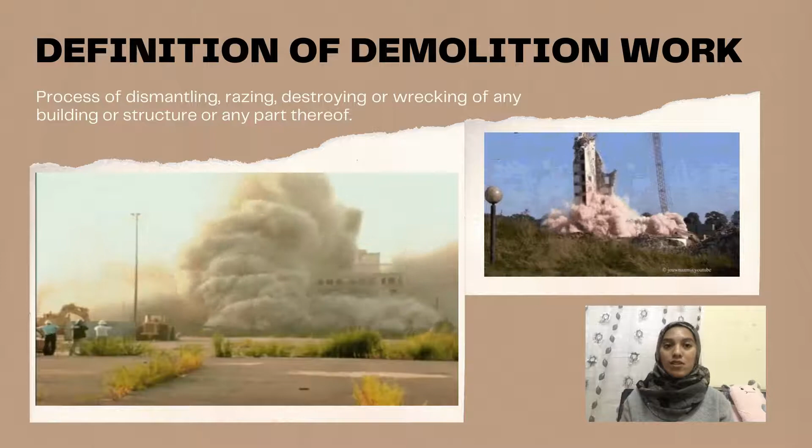I will continue our presentation by explaining in detail the steps to be done before starting demolishing a building or a structure. The first step that needs to be done is surveying.

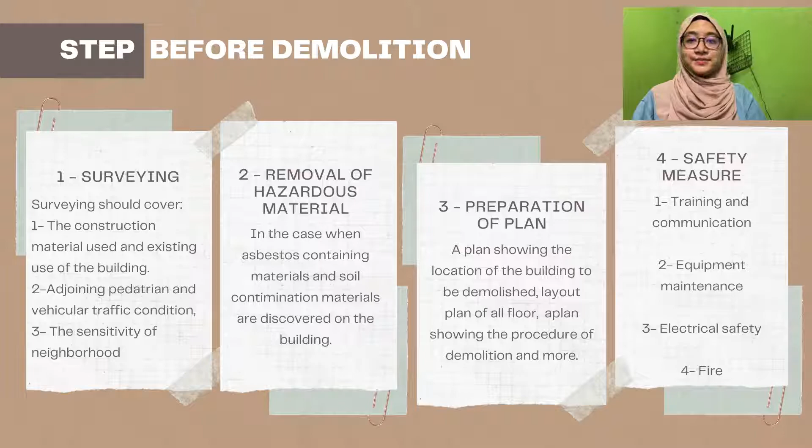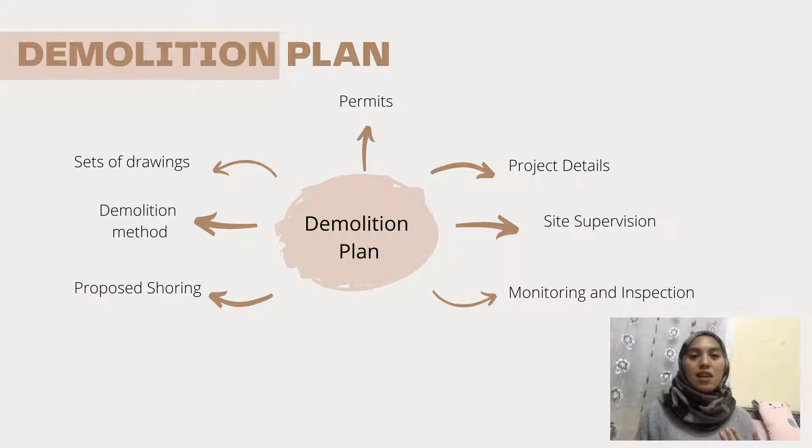This is the demolition plan, either before the demolition work starts or throughout the project. The demolition plan should include a set of drawings showing the building location, existing structure, and so on, proposed demolition method, project details, and proposed shoring either to the existing building or adjacent building. Throughout the project, site supervision, monitoring, and inspection should also be carried out.

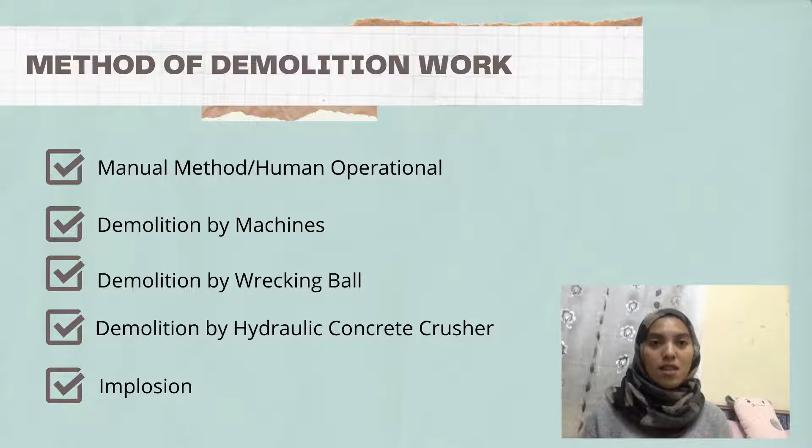Next, we move to the demolition method. There are many demolition methods that can be applied, but here we only highlight about 5 types of methods. The demolition method depends on the area of the project, time available, and the purpose of the demolition.

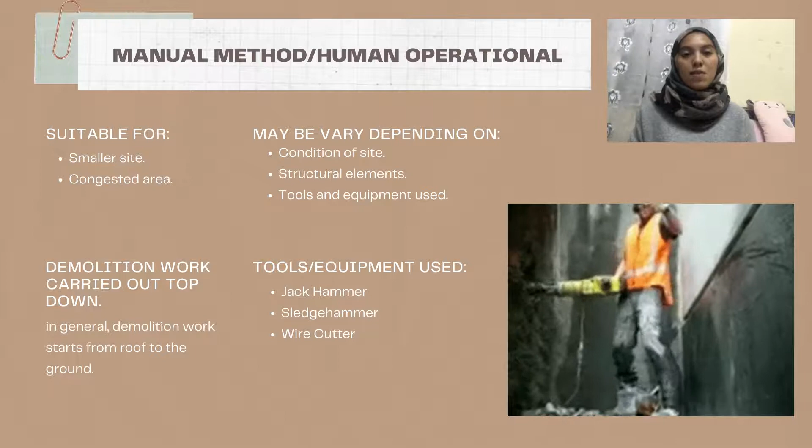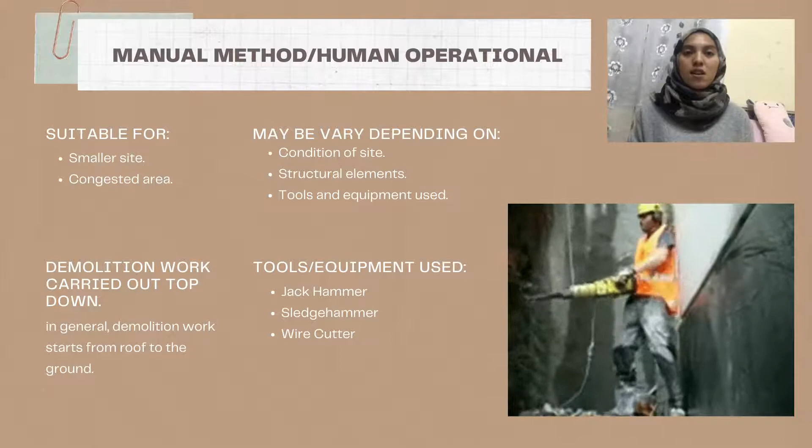The first method is manual or human operational method. This method is suitable for smaller or congested areas. It is carried out top-down, meaning from the roof to the ground. It may vary depending on the condition of the site, structural elements, and tools or equipment used. Tools or equipment used include jackhammer and sledgehammer. The second method is demolition by machine.

The sequence of demolition work is the same as the manual method, but this method is done by mechanical plant. The work begins with lifting the mechanical plant to the top floor. Adequate propping shall be installed at the floor level below as support. However, the movement of the mechanical plant shall be within the prop area, and then the machine shall descend down to the next floor by means of a ramp.

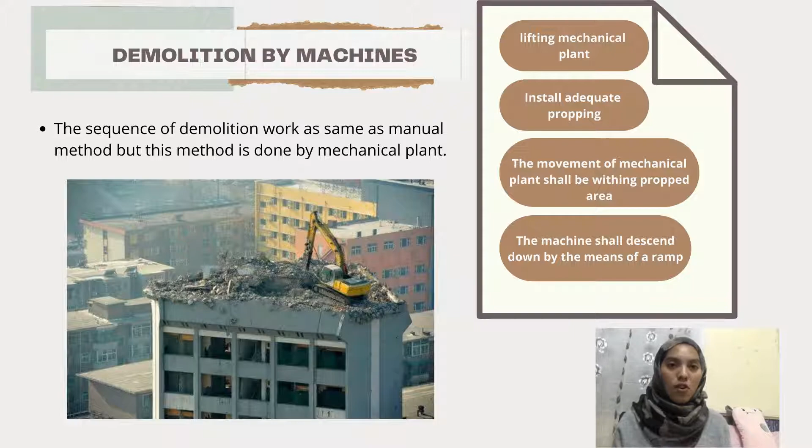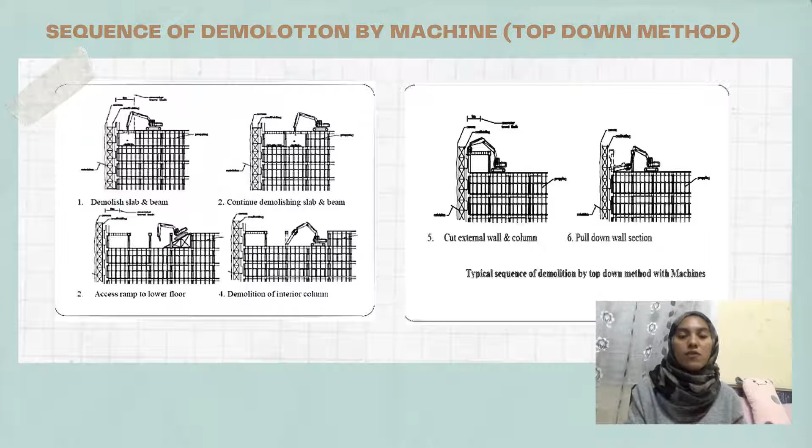This is the sequence of demolition work by machine. The work starts with demolishing slabs and beams until finished. The machine will descend down to the next floor by means of a ramp to demolish other parts of the structure.

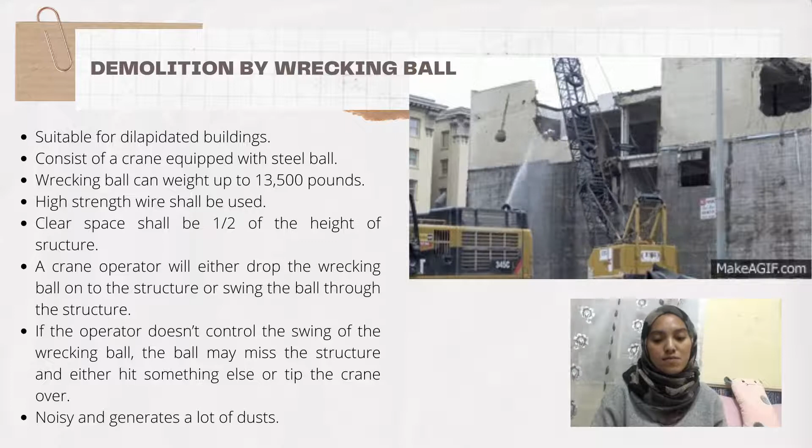The third method is demolition by wrecking ball. This method is suitable for dilapidated buildings. It consists of a crane equipped with a steel ball which can weigh up to 13,500 pounds and requires high-strength wire. A clear space shall be half the height of the building. For this method, a crane operator will either drop or swing the ball onto the structure of the building. An experienced crane operator is required to avoid the ball missing the structure or hitting something else. This method generates a lot of dust and can be very noisy.

Next is demolition by hydraulic concrete crusher. A hydraulic concrete crusher can be operated from the ground outside the building. This method also requires a minimum clear space, which is half the building height. The structure shall be demolished with a top-down sequence. This method can reduce noise nuisance.

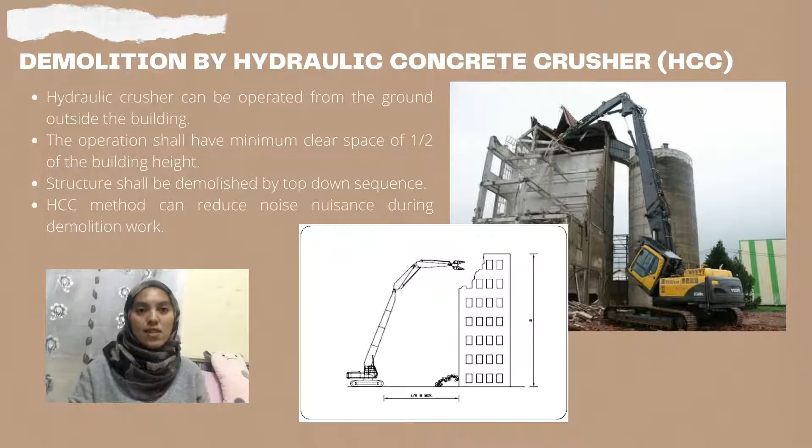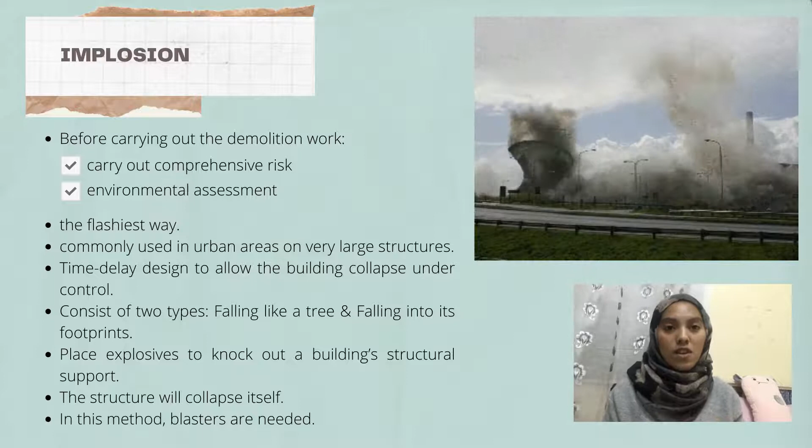The last method is the implosion method. Before carrying out the demolition work, the contractor should carry out a comprehensive risk and environmental assessment on the effect of the implosion on the neighborhood. This method is the flashiest way to get rid of a building structure. In brief, this method is usually done in urban areas or for large structures. Time delay design is important to allow the building to collapse under control.

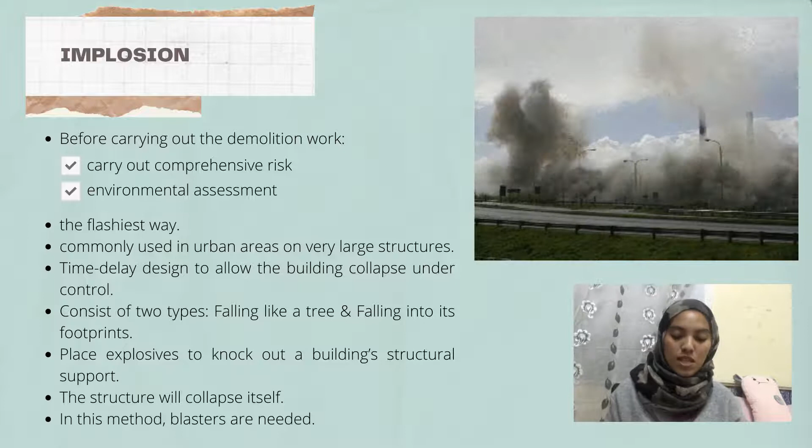There are two types of collapse: falling like a tree and falling into its own footprint. How does it work? By placing explosives to knock out the building structures, and then it will collapse itself. In this method, blasters are needed.

What is a blaster and what does a blaster do? A blaster is an explosive worker. A blaster assesses the needs of the demolition project to determine how much needs to be removed or destroyed. Other than that, a blaster drills holes in rock or structural supports, packs the holes with explosives, and oversees the detonation. A blaster also monitors the safety of everyone on site during the blasting procedure.

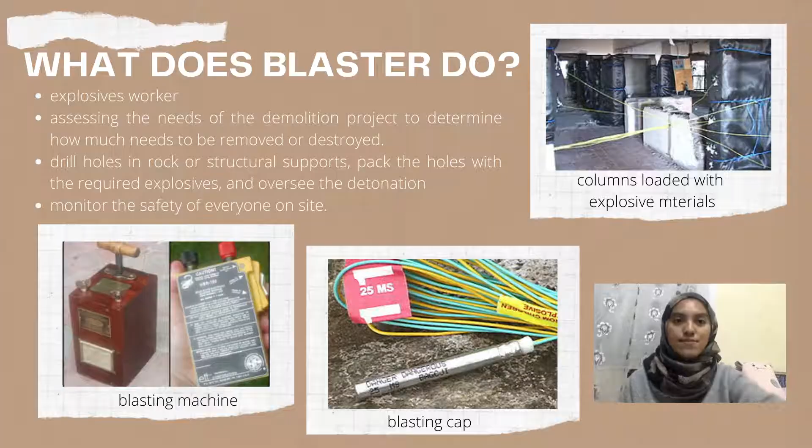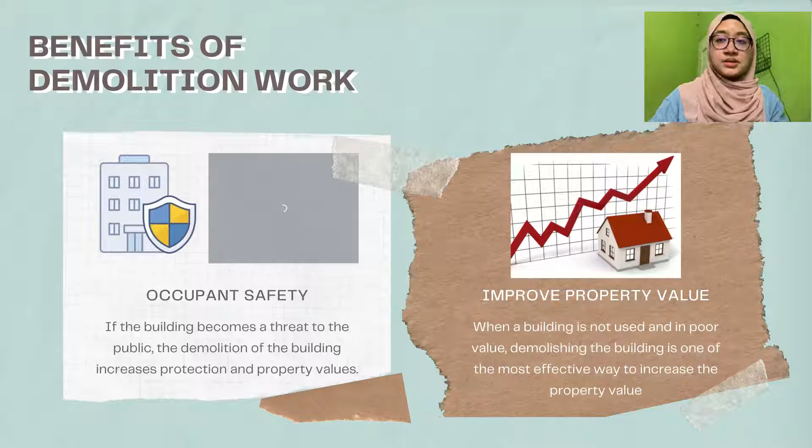The next one is improve property value. Property value can be improved by demolishing the current building and starting a new project on the same site. This proves that demolition work is one of the most effective ways to increase property value. For example, a residential building constructed in 2001 is currently vacant due to its old design or lack of safety precautions, since it was built almost 20 years ago. By demolishing the building and constructing a new project with modern design and high safety, it will improve the value of the building and attract customers or clients to buy the property.

The third benefit is new development. As mentioned in the previous benefit, after demolishing a building, a new development can be created. If the land is in a strategic place and can be used in beneficial ways, dismantling the current building would clear the way for it. Maybe the current building on the land didn't get much attention or attraction from the client or public, or has already been vacant for a long time. A new development is a good way to overcome this issue.

Last but not least, demolition work can be environmentally friendly. Some material from demolition work can be recycled for the next construction work or project, as long as they are in good condition. There are many materials that can be recycled from demolition, such as concrete, bricks, aggregate, metal, wood, and glass. Recycling materials from demolition work not only saves the environment, but also reduces costs for the new project or development in the future.

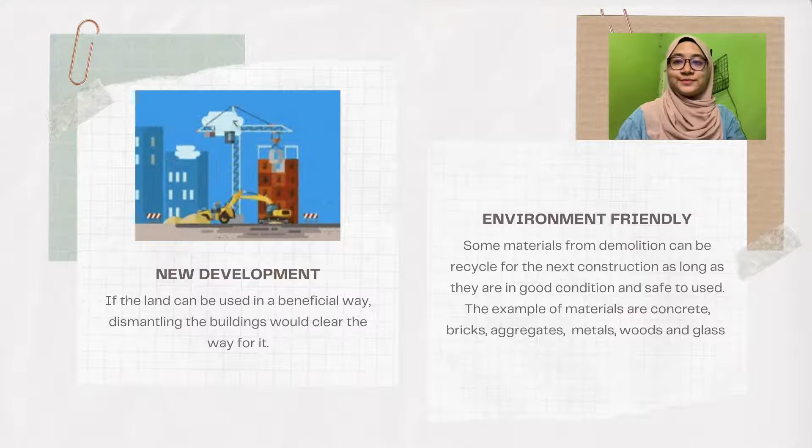Some challenges can occur during or before demolition work. The first challenge is heritage conservation law. Heritage conservation law covers certain buildings of historical or cultural significance to protect them. In some situations, the building to be demolished itself is not of any cultural significance, but it is built in a conservation area. This means the building is still covered by national heritage.

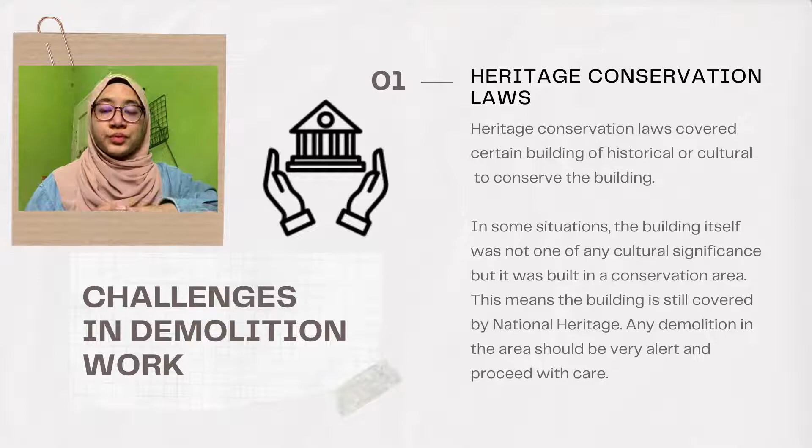If the building is covered by national heritage, it does not mean demolition work is impossible. To perform demolition work on such a building, special permission from national heritage is required, which may delay the project beyond the estimated time. Any demolition in the area should be done with great alertness and care, since it is a conservation area protected by national heritage. The second challenge in demolition work is a place where noise is a problem.

Noise can be disturbing for the area surrounding any demolition work, but there are some instances where the loud work can be particularly problematic. Some places such as hospitals, schools, shopping centers, and residential areas are where the noise from demolition work can be a distraction.

One of the most common examples is when demolition work needs to be done near a hospital. Not only is the sound loud enough to disturb the patients, but the equipment's vibration from demolition work may also interfere with the electronic equipment in the hospital. It is important to make arrangements before starting demolition work to minimize the risk and the stress.

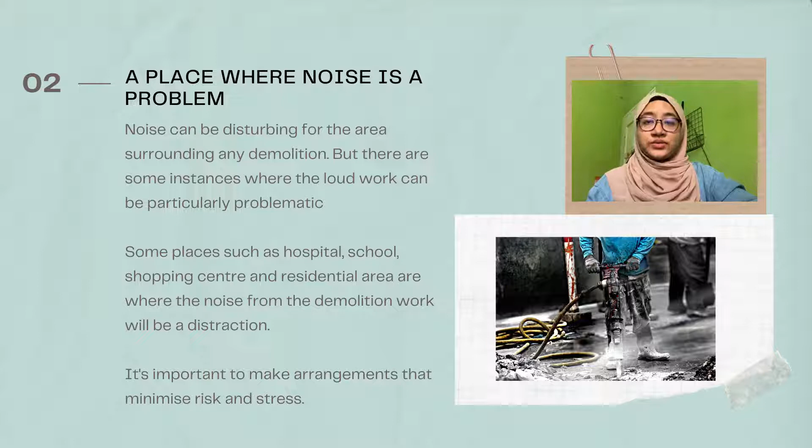The next challenge is hazardous chemicals. Demolition work may involve workplaces or structures that contain or have contained hazardous materials, including chemicals. Hazardous chemical materials include lead, asbestos dust, soil contamination dust, and combustible material that can risk workers' and the public's health.

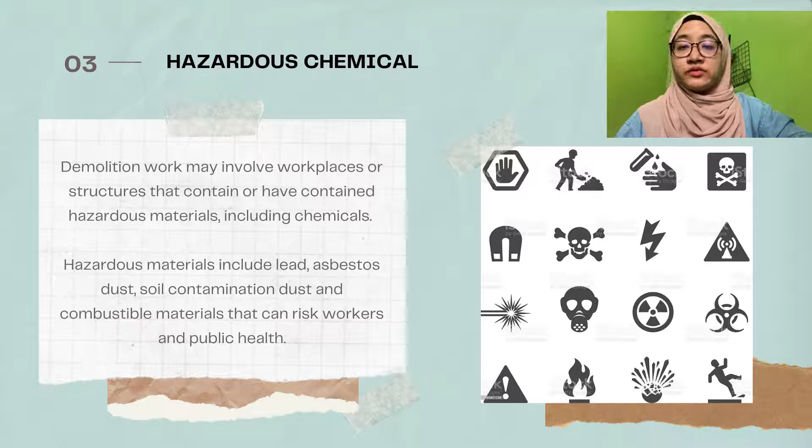Any material that has asbestos or soil contamination generates dust if it is handled or removed before the demolition. Some materials that can contain these hazardous substances include insulation material, fire-resistant wall sections, and flooring. By inhaling this dust, it can lead to respiratory issues for humans. To prevent this from happening, this material should be removed by a certified worker before the demolition work starts.

The last challenge that I will explain is regarding surrounding buildings and structures. If the building to be demolished is attached or situated close to neighboring properties, it takes extra planning and cooperation from the public to carry out the demolition work. It might be necessary to evacuate people from the area for a short time before performing the demolition work.

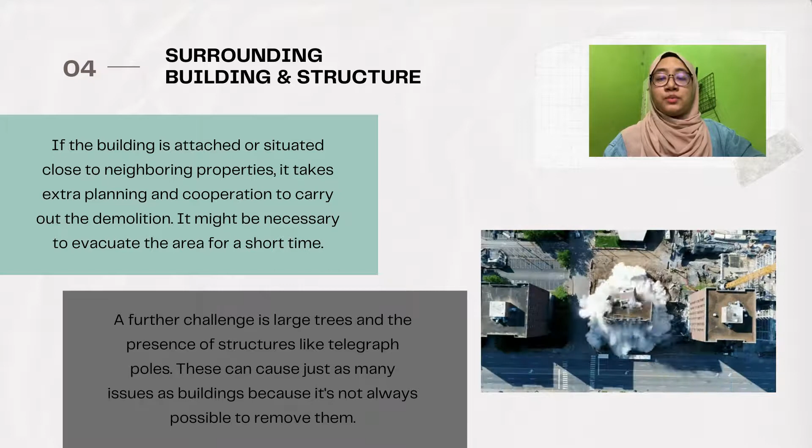A further challenge is large trees and the presence of structures like telegraph poles. This can cause just as many issues as buildings, because it is not always possible to remove them. They will stay in their place, and this issue will be a problem for conducting demolition work and might cause delay to the project.

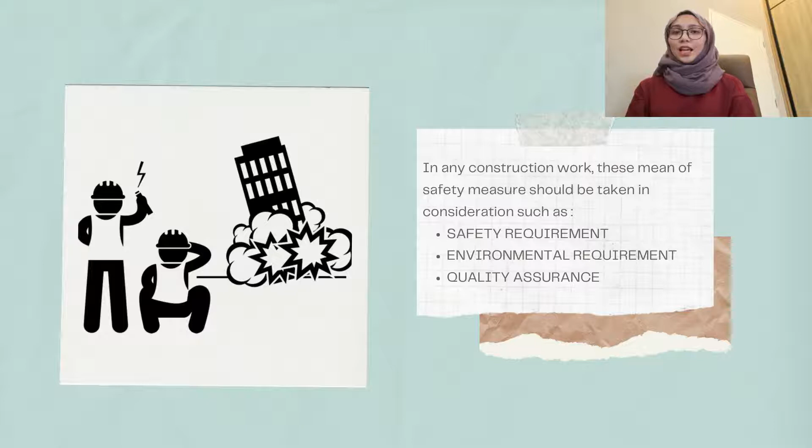Under the safety measures to be taken at any construction site before commencement of work, these are the aspects that should be taken into account: safety requirements, environmental requirements, and quality assurance. Let's move on to the next slide to know more about these aspects.

The first aspect is the safety requirements. Safety requirement is important in making sure all the works to be carried out on site are at the lowest or minimal risk against the people involved on site.

The second aspect is the environmental requirement, a requirement that is mostly related to environmental safety. This aspect focuses on looking after the safety, health, and environment while commencing the work on site.

And lastly, the quality assurance. Quality assurance or QA is the aspect that ensures the work is done at the right place and at the right time efficiently before deciding to commence the work on site.

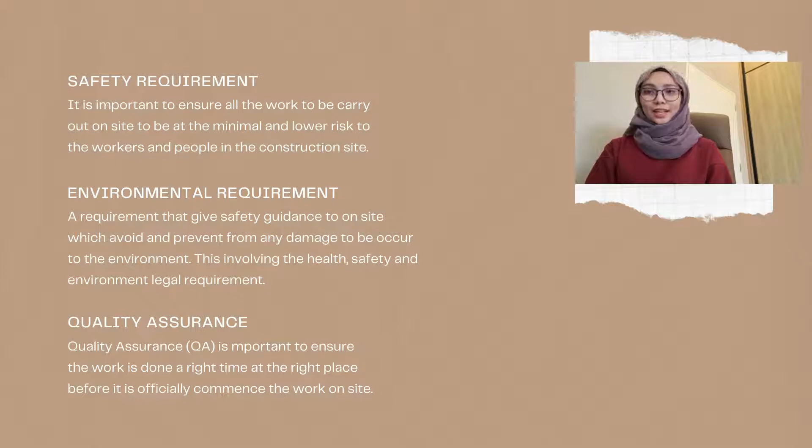Let's go deeper into these aspects. The first one is the safety requirement. This consists of risk assessment. According to the Occupational Safety and Health Act (OSHA), the first step is to identify the hazards involved with the proposed work. Second, to consider who might be harmed.

Third is to evaluate risks and identify precautions. Fourth, to record the findings and implement control measures for the residual safety. And lastly, to review and update if necessary.

In our case study, it involves a schedule of tasks, expected consequences, and who might be exposed to it. This will be the guidance and precaution step for the people involved, with mitigation measures and who will need to take the responsibility.

Next, under the safety measure requirements, is information to personnel. This is to ensure the risk of exposure towards the people involved with the work is minimized. All personnel should wear PPE such as safety helmets, suitable basic protective equipment, and additional PPE whenever required, and safety briefings will be conducted every morning before commencing work on site.

Next is the permit requirement. Permit to work is needed and must be implemented to ensure that the personnel involved in the project are aware of the hazards and the nature of the work they will carry out, and the client needs to provide a well-managed, safe, and restricted working area.

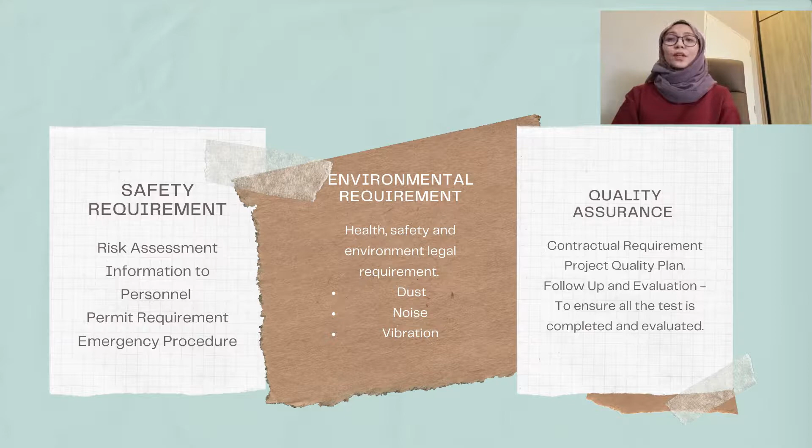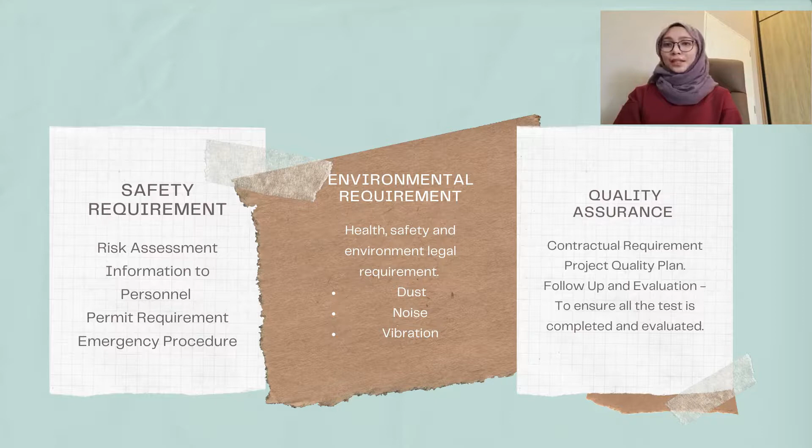From the point of view of our case study, it has the contractual requirement, which is the project quality plan, and the follow-up and evaluation to ensure all tests are completed and evaluated before commencement.

These are examples of documentation under the safety measure requirements. The first one is the job risk assessment. The second one is the environmental operations control log, and the third one is the quality control inspection checklist.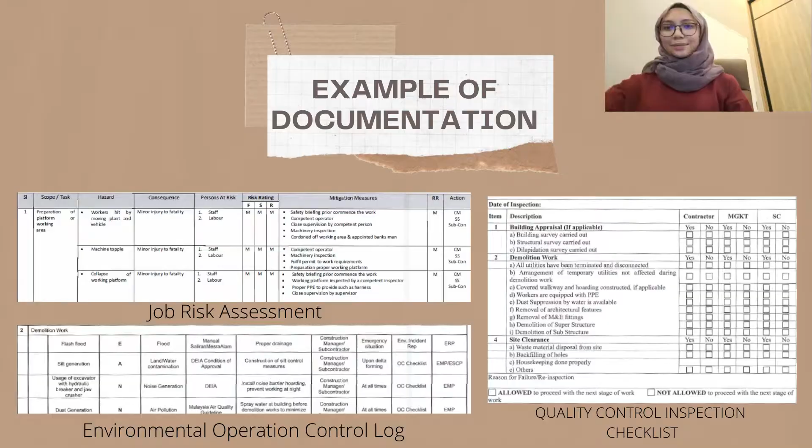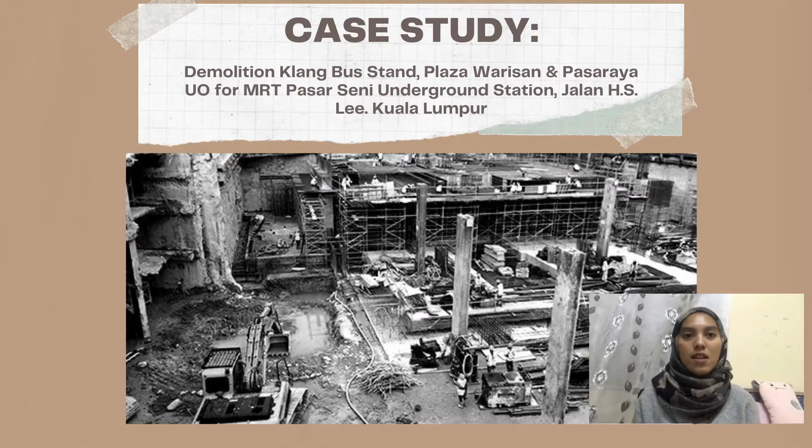Now we will go through our case study for this topic. The chosen case study is the demolition of Klang Bus Stand, Plaza Warisan, and Pasaraya UO for the MRT Pasar Seni Underground Station. The company in charge for this demolition project is Multi Demolition, and the timeline of this project is 12 months.

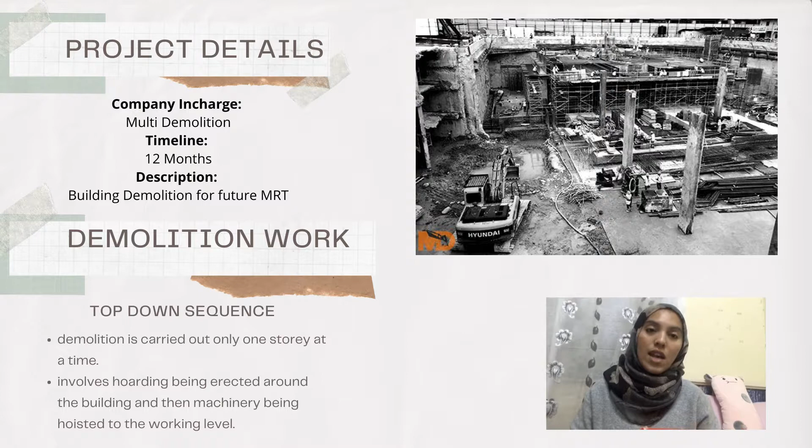The demolition sequence used is top-down sequence. The demolition work is carried out only one story at a time. It involves hoarding being erected around the building, and then machinery being hoisted to the working level.